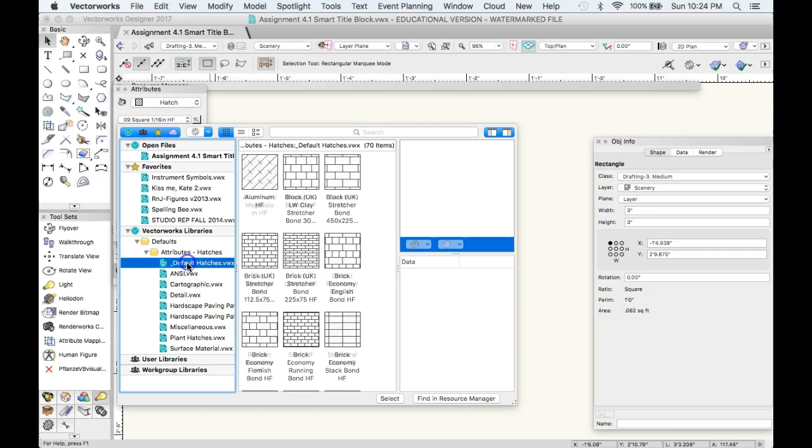So let's start with this one here that says detail brick hatch fill. We're going to select that one. Now it's changed to something that's okay. What we need to do is to create our own hatches, ones that will actually work for us and are easily accessible. So we're going to modify this hatch.

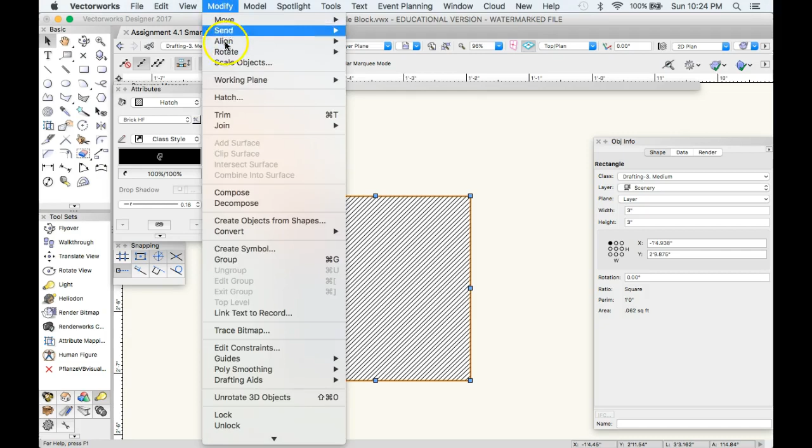We're going to go to modify. We're going to go to hatch. And then we're going to say new. And this is where you're going to want to make 3 different hatches from small to large, however it makes sense to you. So I'm going to call this hatch 1 small.

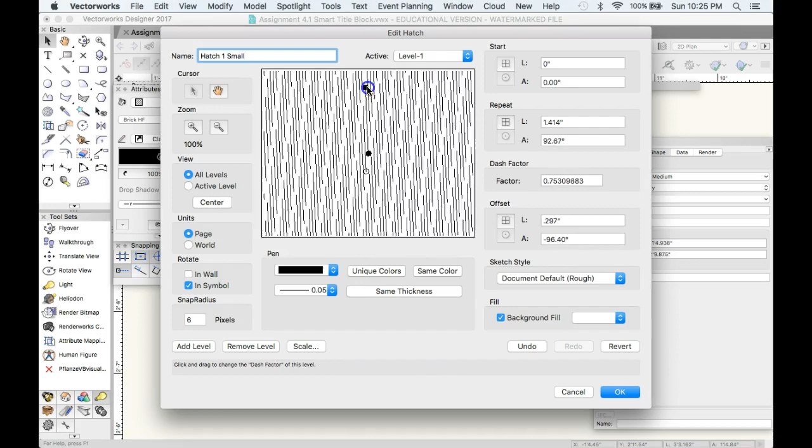And the way that you can adjust this is by moving the different components of this around, okay? You can also change the direction. So this is actually like making it into dashed essentially, but you want to keep it maybe all in one line, because what we're talking about are the hatches that we've been discussing in our readings from hand drafting and from this class. And so what you'll want to do is make this small.

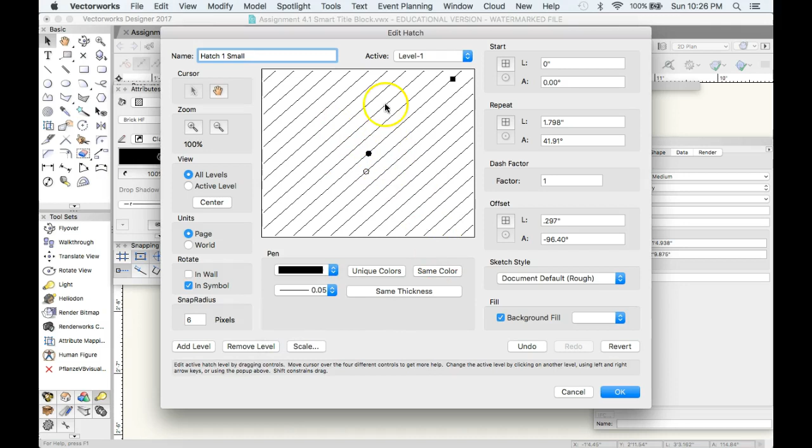So you can affect the pen here, and when you're making larger hatches, maybe you want to use a slightly thicker pen. Be careful about going too thick here, because you don't want to turn it into one giant solid fill. You can also adjust some of the angles here. You can make this all even angles. So I could say 45 degrees, right? And that would work. So here, I'll do 45 here.

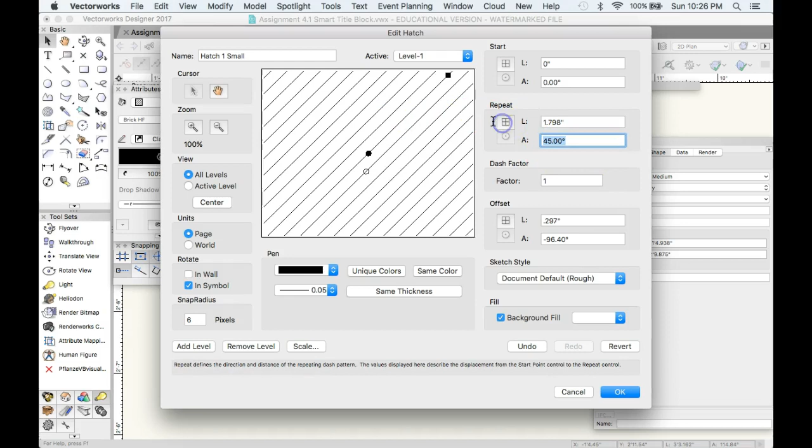Right, so now it's a 45-degree angle. Let's make it a 60-degree angle since it already was. Oops. I'm going to edit that. So there's all these different settings, so you can set the offset, right? If I want to make sure that it is 0.5, I can do that.

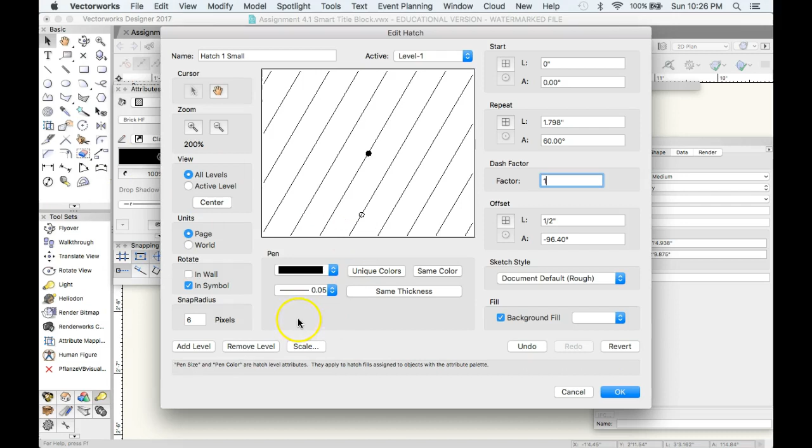And you know what, as you go, you may find that you need to rename the hatch, because all of a sudden it's a perfect medium hatch, but not a good small hatch. So just realize that will be possible later. Don't overthink it here. Just sort of play with things until it works. So I'm going to say okay. And I now have hatch 1 small. And I'm going to say okay again.

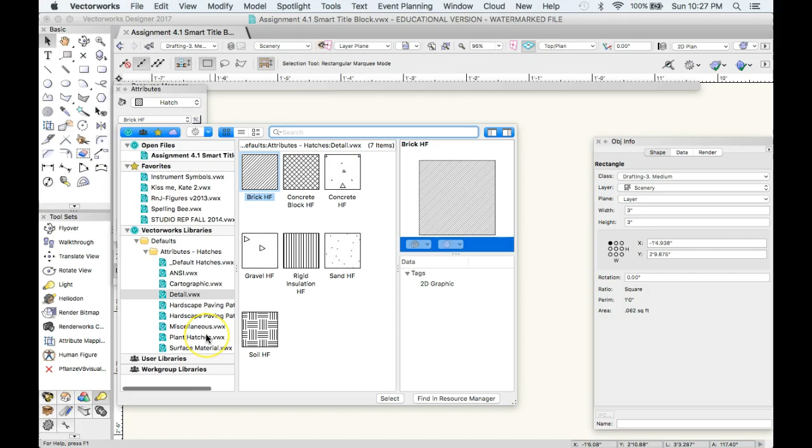Now this one is currently not hatch 1 small, so I don't know what that really necessarily looks like in our 3-inch by 3-inch box. So I'm going to come back over here, and I'm going to find the hatch that we just made, which will be here in assignment 4.1. So right here it is. So if I select this hatch by double clicking on it, I can now see the actual size of the hatch.